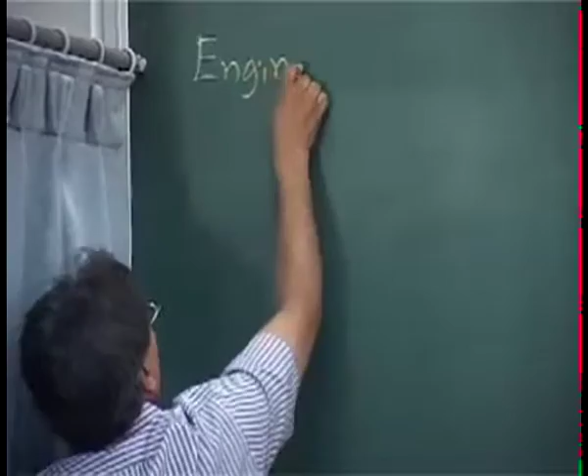So we can say what we are going to discuss is, and first thing we will talk about is the particulate.

Whenever you want to remove something, you need some force. You can't remove something otherwise. If I have to eject you from your chair, I have to use some force. So the force, for the control you need force.

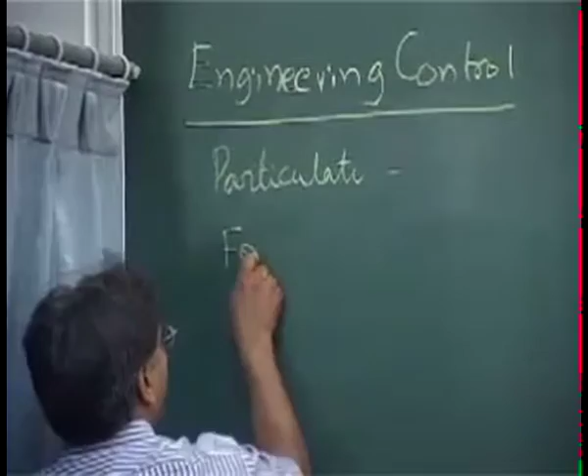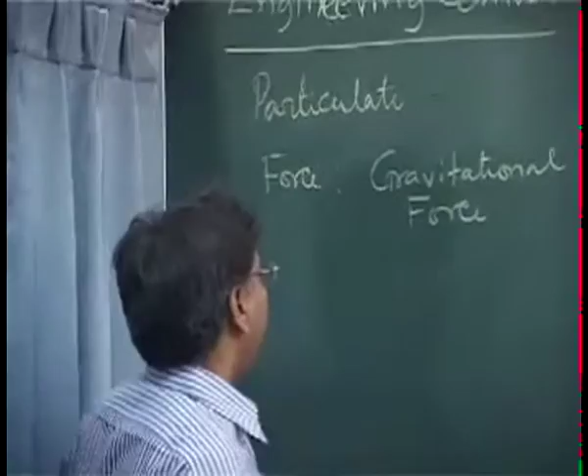What is that force you apply in your water treatment? Gravitational force. So this can be a gravitational force. One can also apply the gravitational force in air pollution control. But this force, which I will show you with some small example, is not so effective, not so powerful, and we will say why it is not so powerful.

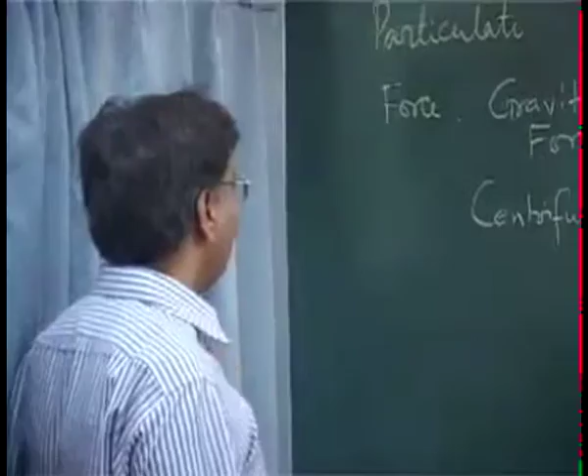So what we do, we apply another force, and then that we call the centrifugal force. And then we somehow, if we understand the centrifugal force, then we can apply it to remove the particle. So I want to do a small example. I want to compare the gravitational force versus centrifugal force for the removal of the particle. Let us see which one is larger and which one makes more sense. We are not talking about where the cost is involved is more. Always gravitational settling will be cheaper because you have to do nothing. Gravity is automatically working. You don't have to introduce any kind of outside thing to improve your force mechanism. So how do we do?

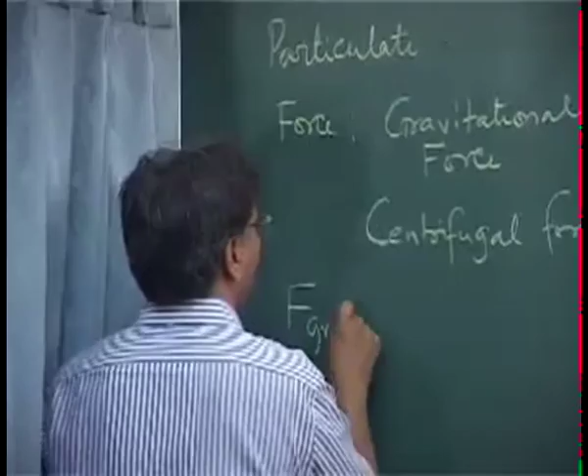Okay, let's compare the forces first. So, gravitational force, F gravity if you like, is mg. And suppose I am providing a centrifugal force, so that force, if I call it C, what is that if you can recall? mv square by r. Everyone recall that?

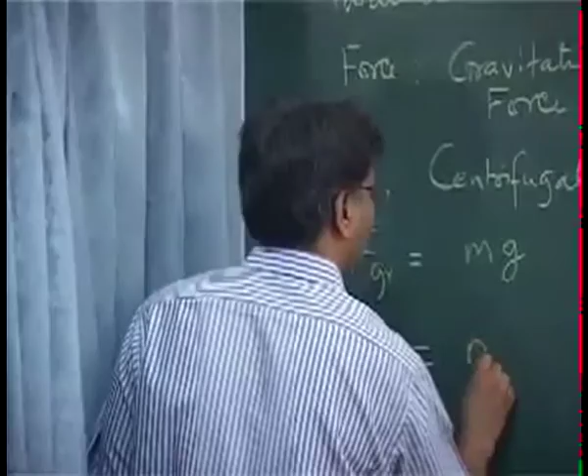Let's call it C, centrifugal velocity. Suppose I take the ratio of these two forces: gravitational force and centrifugal force, Fc by Fg.

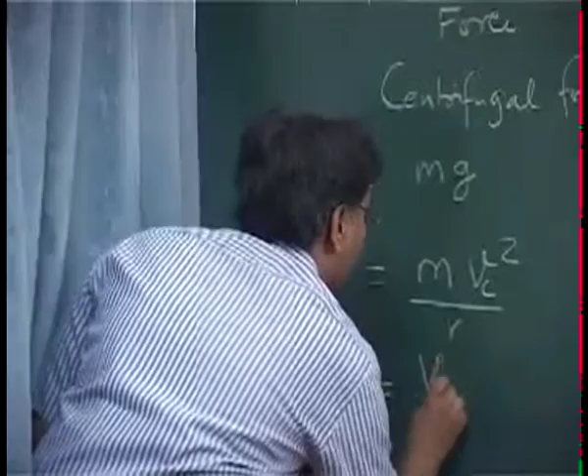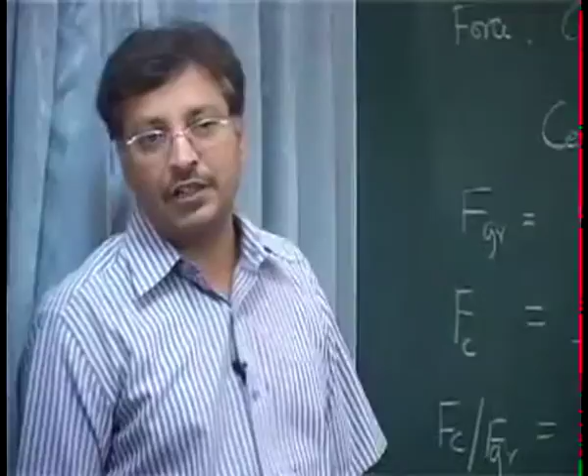This is a simple concept, but it's something you should know well. If I write this, it becomes Vc squared by R by G. Suppose I am able to give the centrifugal velocity as 20 meters per second and maintain a radius of R equals 1 meter, taking G equals 10, how big is this force compared to Fg? My Vc is 20 meters per second, G equals 10, and R equals 1. The answer is 40 times.

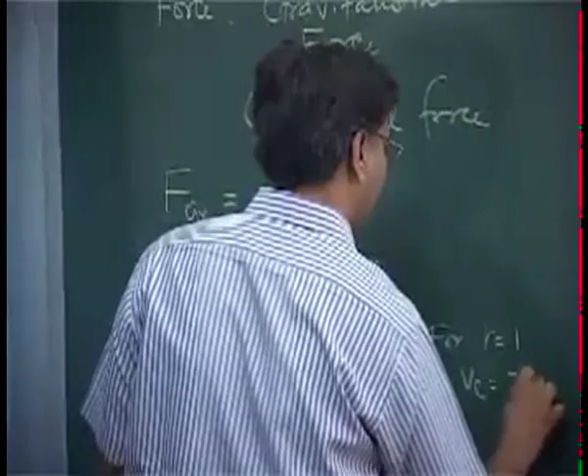This is just an example to explain why we are looking for the centrifugal force. For R equals 1 and Vc equals 20, this ratio shows Fc is almost 40 times Fg. So it makes sense that we should really apply the centrifugal force to remove the particle.

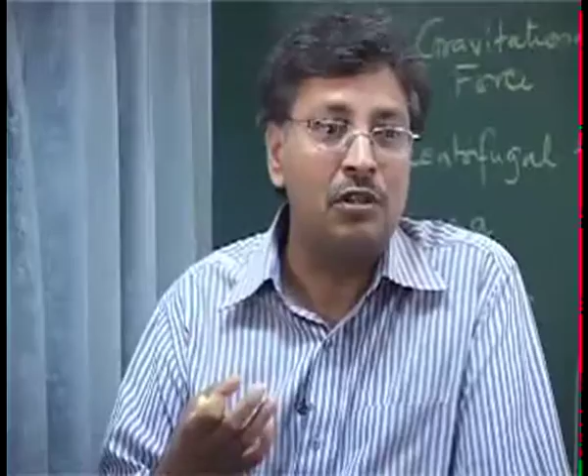Have all of you heard of the centrifuge used in the laboratory? What are we doing? The same thing - we apply a large centrifugal force to separate particles from water, so they quickly settle on the bottom, and then you decant it. If the centrifuge was not there and you had to use gravitational settling instead, you might have to wait overnight for 24 hours for everything to settle, and you don't have that much time. Even if you had such time, our processes are continuous.

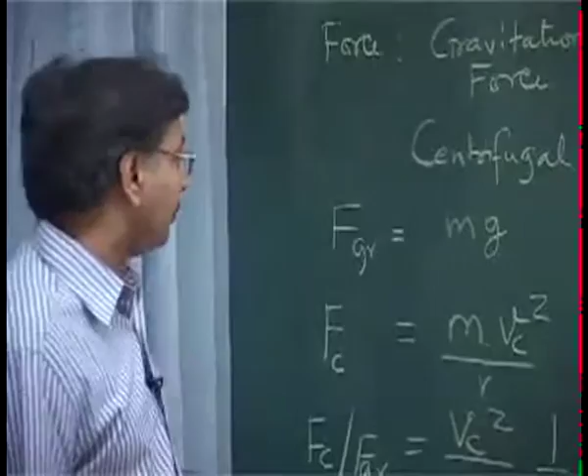If we have to make water or air stable for that many hours, the dimension required for the tank would be very, very huge. So that is also one of the constraints - not only may it take time, but the dimension required may be very high. So we apply - I am not saying we don't use gravitational force - but we apply the centrifugal force in the engineering control of particulate matter in air pollution.

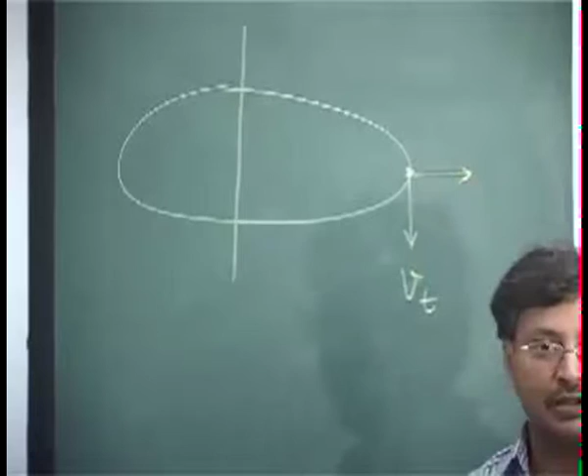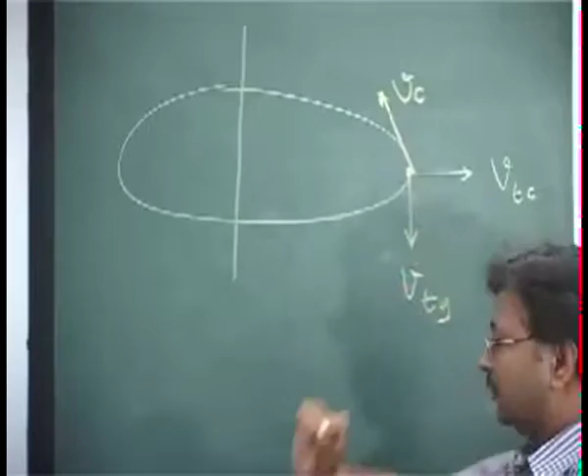Let's look at this from the point of view of the velocity through which particles will be removed. Suppose this is my axis and this is the circular path through which I am providing the centrifugal force. Looking at this point, this is my terminal velocity due to gravity. How does the centrifugal velocity act - which direction? It tries to throw the particle outside. Let's call that VTC, and this one VTG. Where do I show my VC? Tangentially here, right. So this is my VC.

Let us compare VTG versus VTC. VTG is the terminal velocity due to settling - which law governs that? Stokes law. How do we get Stokes law? What are the forces applied on the body? Gravity, buoyancy, and drag - three forces. When the three forces are in equilibrium, the particle attains a constant velocity because acceleration is zero, since the forces are balanced, and you can find this out. If you recall, this will be G by 18 times mu, with particle minus medium, let's call this P for particle.

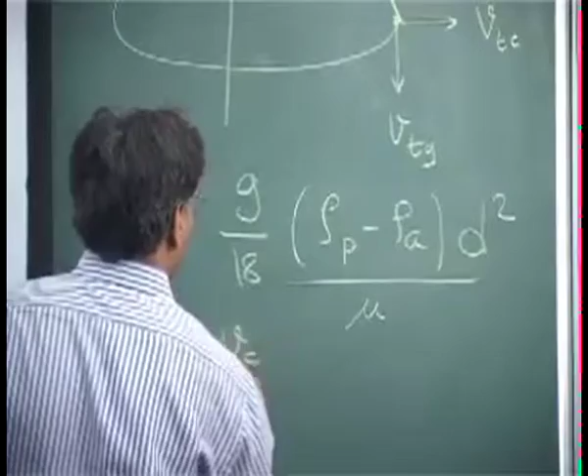Now I have to find out VTC. The same forces are acting, but if I replace the gravitational acceleration g with the centrifugal acceleration, I can get the same equation for the settling or removal velocity with the help of the centrifugal force. What acceleration should I replace g with? Look at this and tell me - what is the acceleration here? V squared by r. So I can replace g and get the velocity for that case - simple thing. So let's write, instead of g, we write Vc squared by r, and add in the same expression.

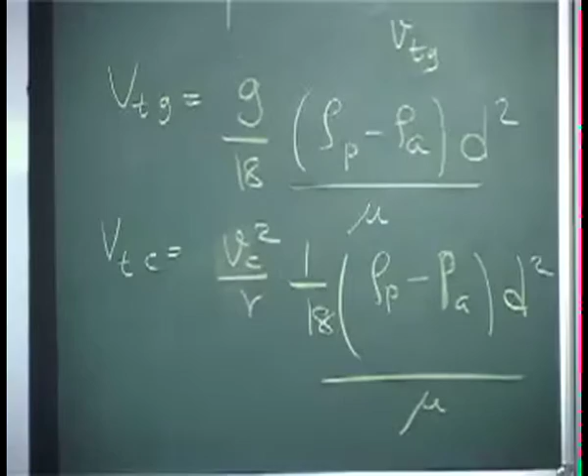Suppose if I take r equals to 1 and Vc as 20 meters per second, how large will Vtc be compared to Vtg? Particle diameter is the same, viscosity of the medium is the same. You see the velocity will be how much time? 40 times if I take r equals to 1, okay, something very similar to what we got. You can find out in terms of meters per second square, meters per second, and you see again the Vtc is also very, very large.

So then why do I not apply the force of centrifugal to remove my particles? The devices through which we use the centrifugal force to remove the particle is what we call a cyclone. So the devices that use this concept, which we derived in a qualitative sense, are called cyclones.

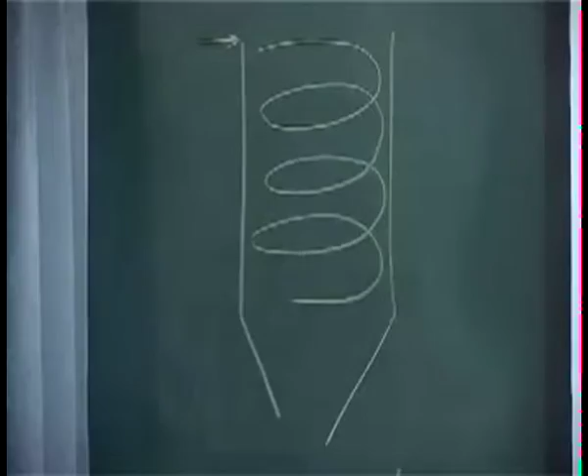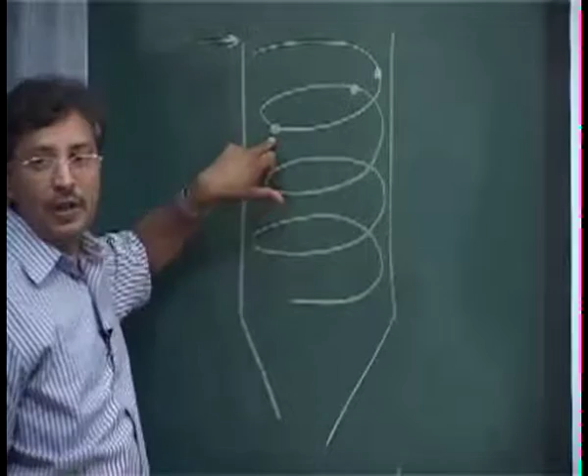Let us say this is the particle, and this is the particle, and let us say this is the particle, because all of them will go along with the gases. That is the helical path being shown here. If I talk about this particle, who has more inertia, the gas or the particle? The particle has more inertia. As a result, the particle will continue to move in its own direction and leave the stream of the gases.

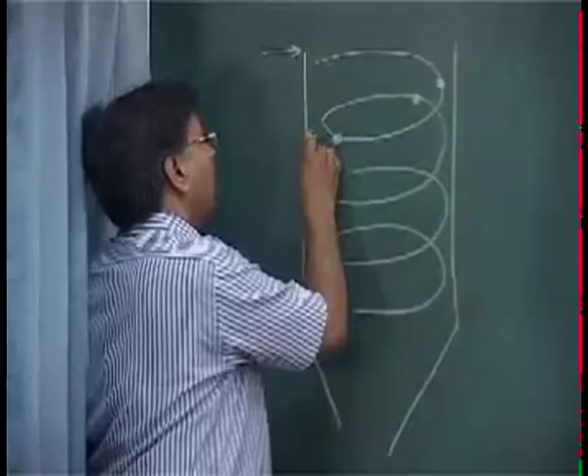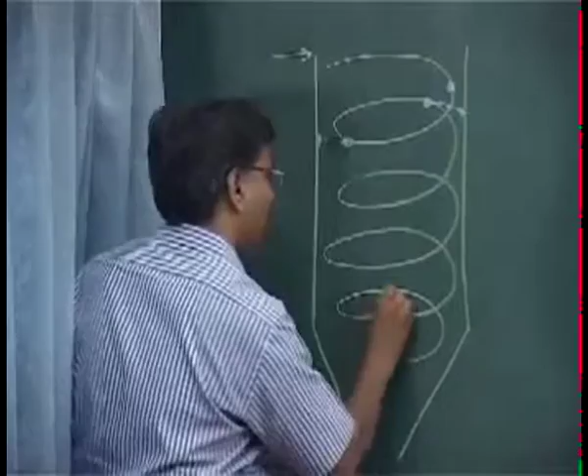So this particle, if we continue with this, it leaves - this is the path of the gases. Because of this tangential velocity, it will come here and hit the wall, and with the impaction it will stick onto this one. And the same thing - this particle, because of its own inertia, will continue to move tangentially, and this is how the whole thing will go on, keep on going round and round. Then finally, when the gas is more or less clean, it moves back with the inner helical to go out.

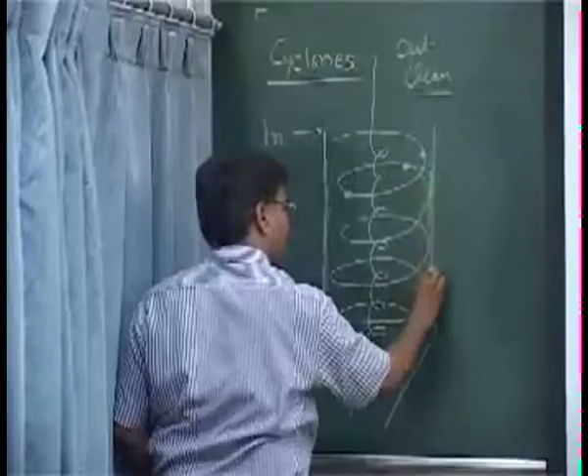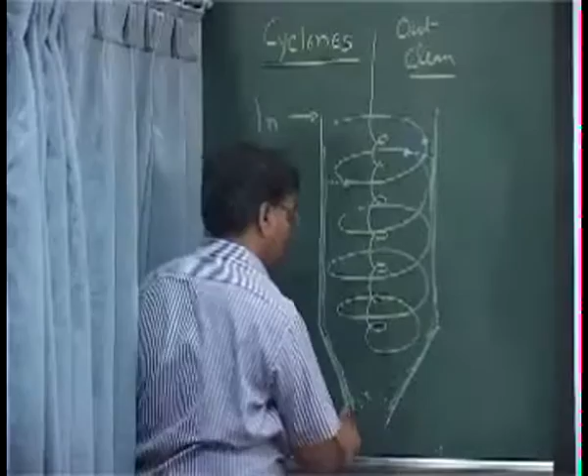And this is clean. You will see within no time the particles depositing here, and then you have a layer of particles here, which falls back into the hopper. These are the particles which hit this one, and then they fall if you shake it a little bit, or just because of the cake as it develops, it will fall here. This is the mechanism through which you remove the particles. One of the ways to remove the particle is to have the cyclone.

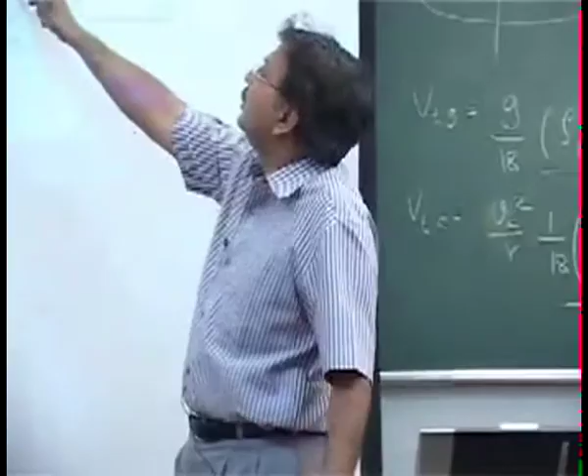So let me again go over a few things I want to tell you. Some of the dimensions you see here, D naught, these are important, what I am saying. This is your diameter of the cyclone.

And this, you haven't mentioned, this is DE, that is the exit diameter. This distance, not from there, because that is connected somewhere, we don't know. But this distance, the outlet pipe must go inside the cyclone body, where do I write it? I didn't write it, but take this as S.

And then this is the height from here to the cyclonic body, that is H1, and the conical section is H2. This diameter is DD, and D naught and D this. So every dimension you see here, H, W, H1, H2, is defined in terms of the diameter of the cyclone. This is a standard practice and it works fine.

So the important thing is D naught, and the rest of the things, that is H, W, H1, H2 and DD, is defined in terms of the diameter of the cyclone, and this definition is like this.

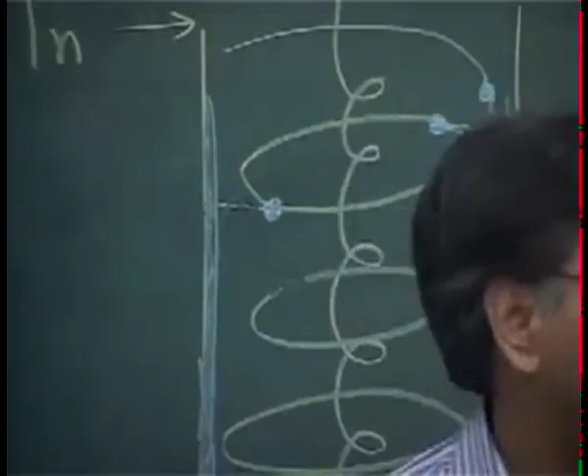W, that is width of inlet, the ratio to D naught is 0.25. H to D naught is 0.5. What was H? The height of the inlet. Suppose I am coming with a pipe which is tangential, this height. So H by D naught is 0.5, and H1, that is the cyclone body, to D naught is 2 times. H2 is the conical section, is again 2.

S is how much the pipe should go into the cyclone to avoid short circuiting. So S is 0.625, and DE, that is the outlet, is 0.5, and the bottom one, which is also important, is DD, which is 0.25. It is kind of a fixed dimension. So you simply need to come to know about D naught, that is what diameter you want, and the rest of the dimensions are fixed. I am sure you must have seen some cyclone somewhere.

So that is how the cyclone works. Let us talk a little bit more about the maths or theory of this one.

This is what we have defined here, the cut diameter of the cyclone. Cut diameter means the particle diameter that will be removed with 50% efficiency. That is how cut diameter is defined. We define cut diameter because otherwise we cannot define the diameter, since you cannot guarantee that something will be removed with 100% efficiency.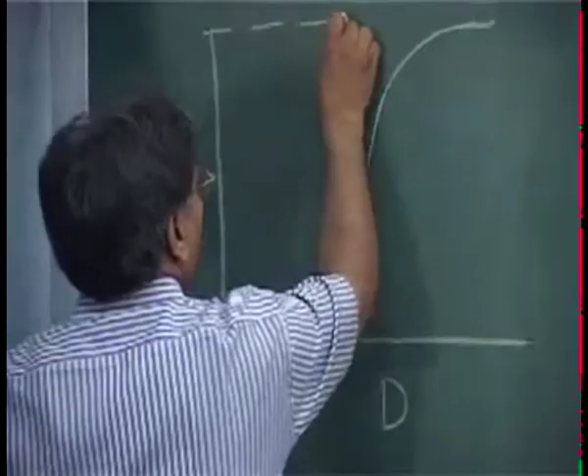So let me draw a graph to explain what exactly D cut is: efficiency of removal on one axis, and D, the diameters, on the other, for particles of various diameters. This is 1, meaning 100% removal. Then here, this is 50%, or 0.5 if you like. This is your D cut, or in the literature you will find this called D0.5. That is what is important for us, to find out with what particle size it will be removed fully.

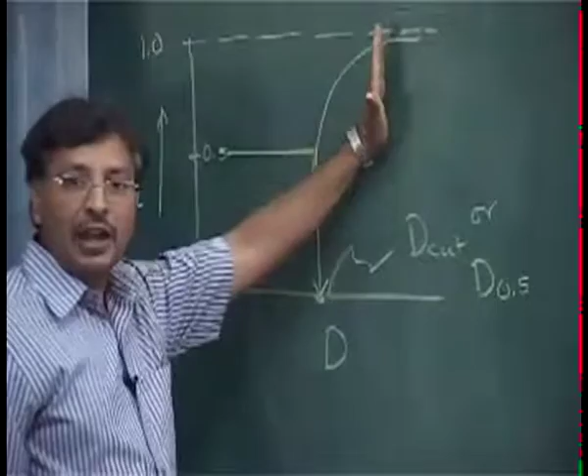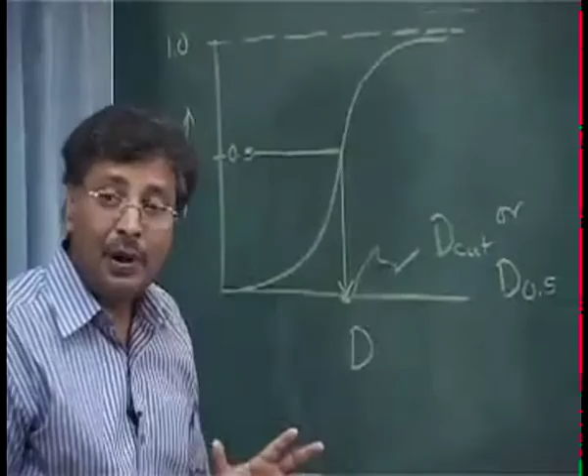Let me explain the terms involved. Particles larger than this will be removed like 99%, 98%, and particles smaller than this will be removed with a smaller efficiency. Have you seen our high volume sampler or respirable dust sampler? You haven't. Okay, doesn't matter, you should see one. So normally for the cyclone we do not define the particle that will be removed 100%. We define the efficiency of the cyclone system as the diameter which will be removed completely with 50% efficiency. So this diameter, as you see, will be removed with 50% efficiency; larger than this with higher efficiency, and lower than this with lower efficiency.

So now let me explain what these terms are. W is the width of your tangential pipe which is going into this one, and Mu is the viscosity of the air.

Vc is the speed that you could give inside. Rho particle is the density, and n is the number of turns that the gas stream could make. So here you see the number of turns of the outer helix. Do not be confused with the inner helix, we know the inner helix turns will be much larger. We have the outer helix in the cyclone, so that is the number of turns it can make.

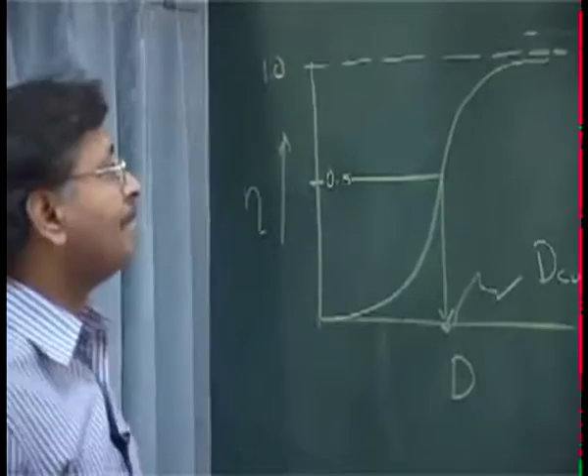You will not have the calculators, but let us discuss the same thing further. If you have decided this is W, you know the number of turns it will take. You know the velocity that you are giving, you can find out the D cut.

Should we do an example? Let us see if we can quickly do it.

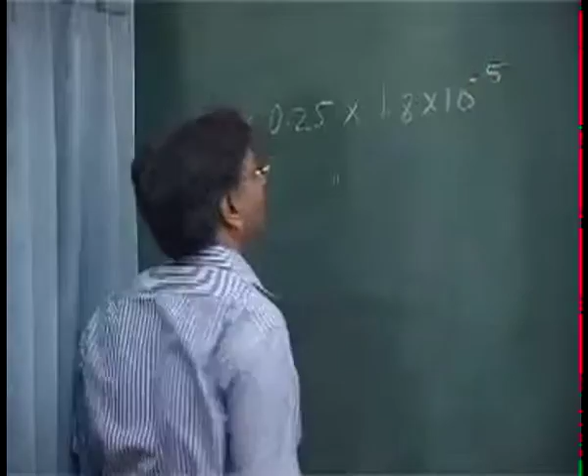Let us say I take that as 0.25, that is my width. Mu is how much for air. Suppose I am able to give 5 turns. Rho particle, let us say 2 grams per cc, so I can write this as 2000 kg per meter cube as rho particle, and I have to have the Vc, let us say Vc is 20. I repeat, W, mu, Vc, 2 pi, number of turns 5, and the particle density as 2000 kg per meter cube. Can we somehow do it quickly, or will it take some time?

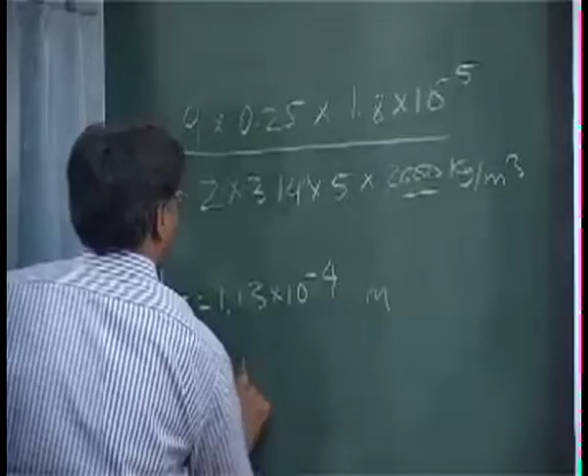1.13 into 10 to the power minus 4, correct? This is in meters. Very good, so this is my D0.5 of this design I am talking about. I can convert this into microns, that is generally what we measure particle size in, microns. So multiply this 1.13 into 10 to the power minus 4 times 10 to the power 6, so that becomes micrometer, and that will be about 113, something like this. This is really a hypothetical number I had taken.

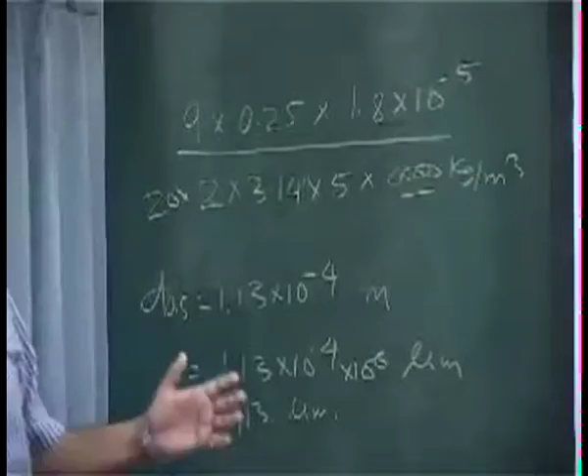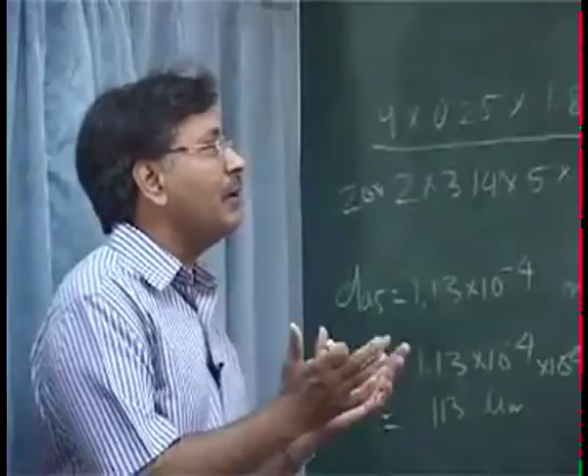But generally, we are able to comfortably remove a particle with size about 5 micron. Obviously since I have taken this as 0.25 meter, this velocity could be increased, but depending on the variables, we can go down to about 5 micrometers as the particle that can be comfortably removed. But then I must define what I mean by comfortable. So let us see what is the comfortability of the system.

What is more difficult, to remove the larger particles or smaller particles? The smaller particles is always a problem. If I want to remove smaller particles, I must bring my D cut down, because I want a small particle. If I want to bring the D cut down, what are the control variables I have? I can't control mu, I can control W, I can control N, but there is a limit for N because it will become too large. I can control Vc, I cannot control the rho particle.

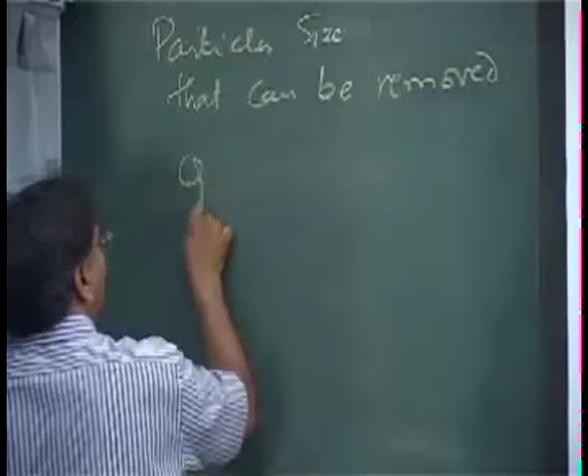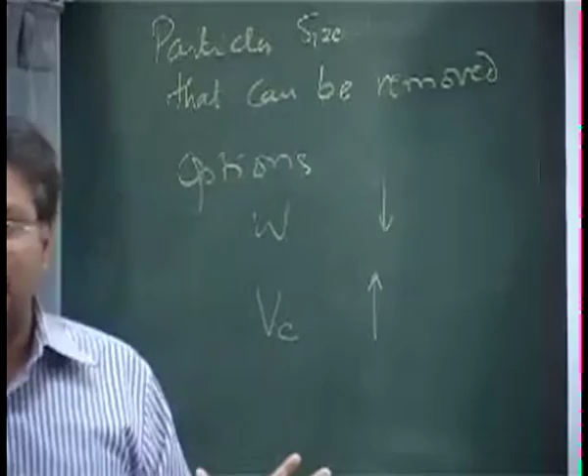I want to define something important which you will need to understand, at least in a qualitative sense, which is the pressure drop across the system. Before we see which is the better option, this one or this one, we need to define the pressure drop, which is delta P across the device. To just give you a feel, if the pressure drop is high, what it means to you: suppose there are two devices, one having high pressure drop, another having low pressure drop.

Vc will be very high if the pressure drop is high.

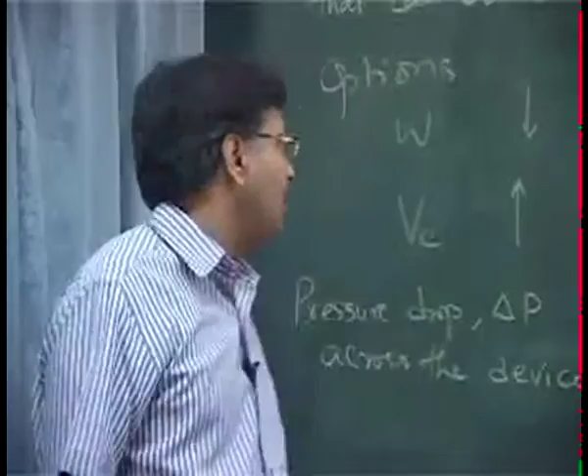That argument we agree, but let's not get into the Vcs for now. I have a system, leave aside the cyclone, say we have a room for ventilation. There's a pressure drop in the room as the fluid travels. If the pressure drop is more and I want to maintain a certain velocity, it means more pressure drop requires a more powerful fan or blower to force the air through the system. If my blower capacity is more, it means my power requirement will be higher.

If the delta P is high, I need a huge blower, and my power requirement will continually go up. We'll talk about this at some other point, but generally delta P is proportional to Vc square.

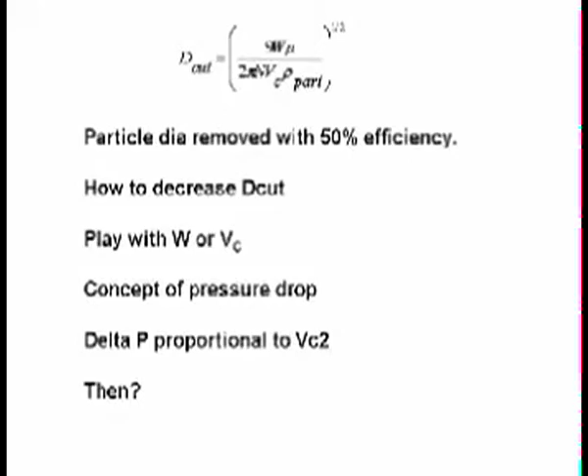So if I decide in my system that I want to decrease my D cut, I can increase the Vc, but I can't increase it too much because otherwise I'll need a very huge blower and my pressure drop will be high. Pressure drop being high means my cost of running the equipment will be high because my power requirement will go up, and that's a major consideration in industry. Size of the blower is also a major consideration.

So generally this choice is not good. I am left with another choice.

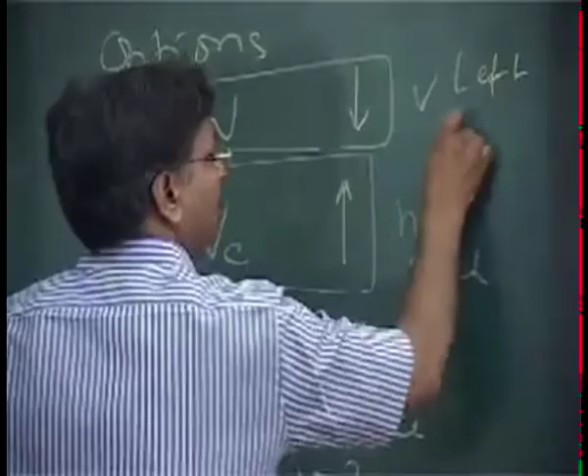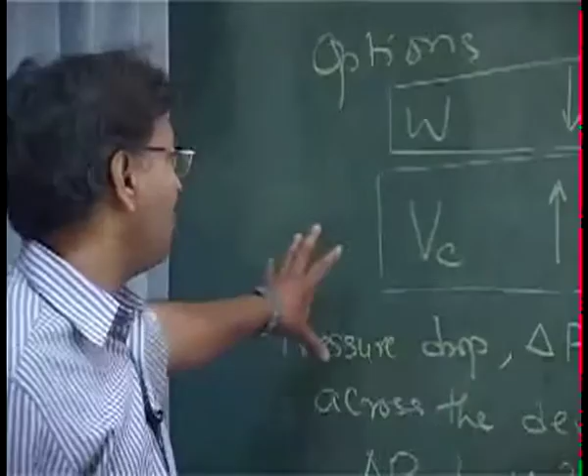I can decrease W. If I decrease W, what happens to my cyclone? I want to maintain the same Vc, because I don't want to disturb Vc—if I reduce Vc, my D cut goes up again. So I keep Vc constant and reduce W, then my cyclones become small. It means I should have lots of cyclones to maintain the same Vc with reduced W.

This system, where we reduce W for the same Vc because we don't want to disturb Vc due to pressure drop concerns, is called multi-clones or multi-cyclones. By going multi-clones, I can reduce the particle size to a reasonable extent, while having more cyclones placed without increasing my power requirement or blower capacity.

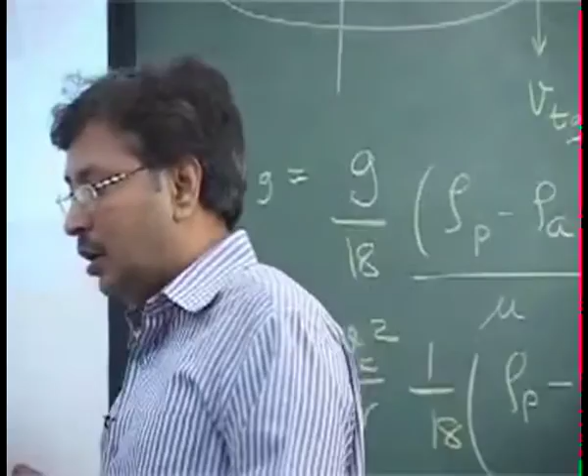But there is a little problem. What is the problem? An important thing that you should understand is that the pressure drop across each of the little cyclones should be the same.

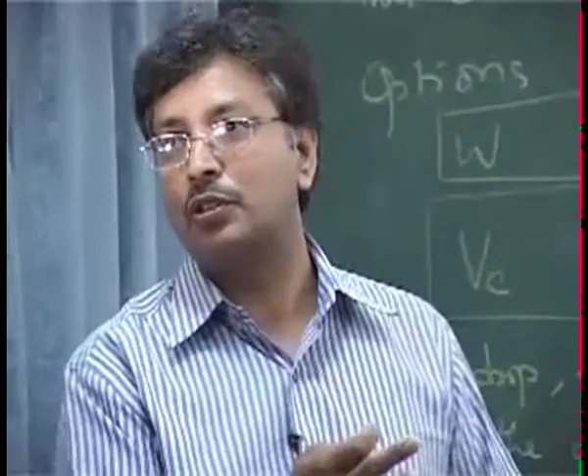If some cyclone has lesser pressure drop, all the air will go through that one, because wherever the pressure drop is less, there is an open area, and the fluid will follow the path of least resistance. So one of the cyclones will be loaded heavily, and the others will not get gas going through them. This becomes tricky, because you have to ensure the pressure drop across each of the tiny cyclones is the same.

That is the key for operating multi-cyclones. You may not find so much detail in the book, but the concept is this: they have some mechanism to measure the pressure drop across each of these, and they have to maintain the same pressure drop.

Maintaining the same pressure drop means maintaining the same VC, and you have to have identical dimensions. You can't have one cyclone bigger and another smaller.

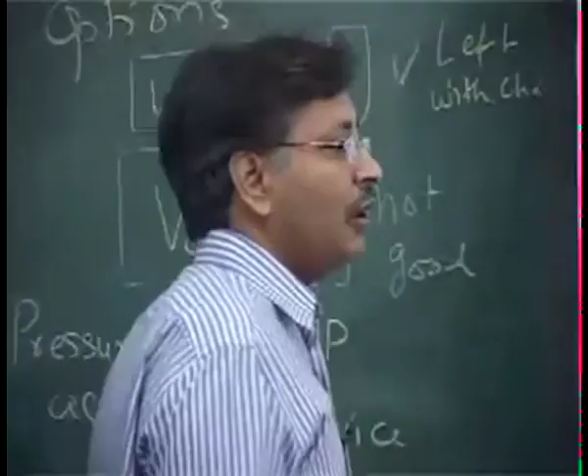You will find this in many plants, whether it's an air pollution application or just cleaning certain things within industrial processes—this is very commonly used. So now you have the concept of multi-cyclones, why we need to go to multi-cyclones, and what we need to maintain to ensure they function properly.

Now I want to move to something else. There is a limit to what centrifugal force can do, so we should think of applying more force. Centrifugal force works up to some level, but in combustion processes and many other processes we encounter particles even in submicron size—1 micron, 0.5 micron, 0.2 micron—and these are more dangerous than larger particles.

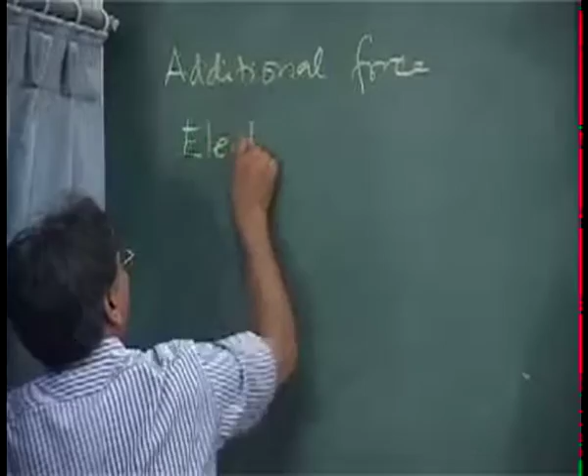If your particle size is larger, you can go ahead with the cyclone and be happy, but that's not always the case. So sometimes one additional force that we apply is electrostatic force, an additional force, to remove smaller particles.

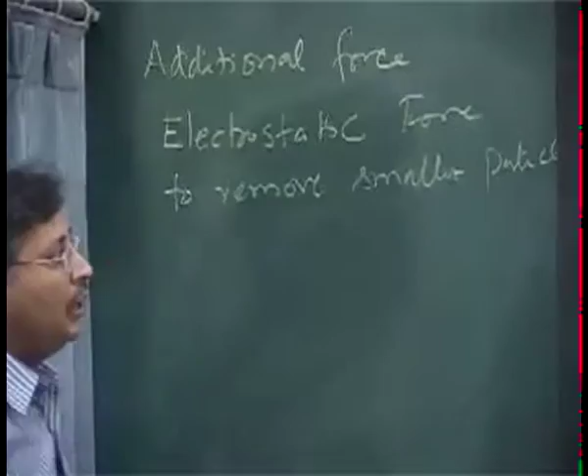Let's work out the physics of this. Why would electrostatic force be a better approach? Suppose, in general—again we are not talking about the ESP specifically—

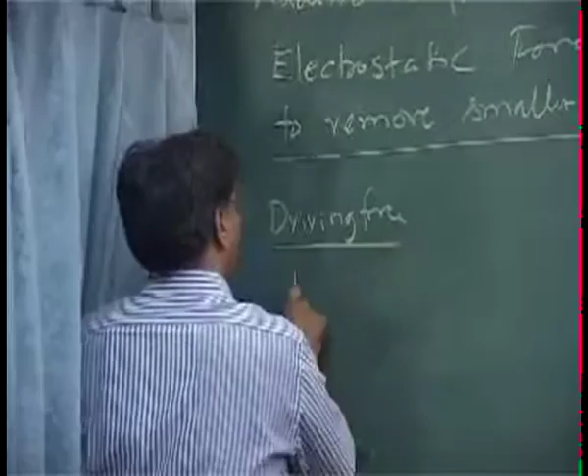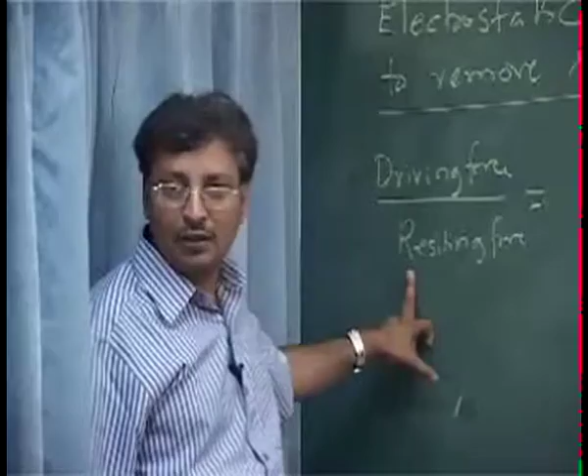I am driving the particle to come and get removed, applying various kinds of force. One force was gravitational force or centrifugal force, and there is a particle resisting—it doesn't want to move, or something is stopping it from being removed. That resistance is normally a drag force.

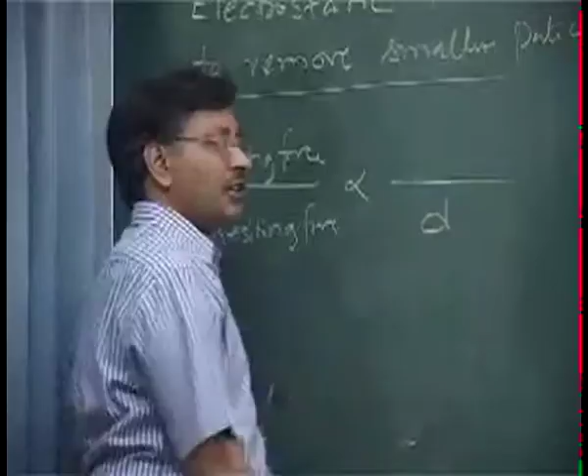So let's try this: the drag force in terms of the diameter, since we are focusing on diameter, is proportional to the diameter of the particle. If I say the driving force, which may be gravitational or centrifugal force, in terms of diameter—what is that? Is it the square of the diameter, the square root, or the cube?

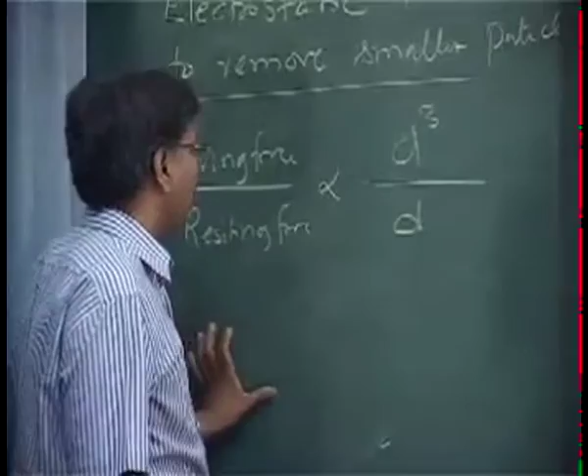Mass is the same—it's the cube, right? You agree? So this is d cube, because whatever force you take, there is a mass involved, and mass is related to volume, so more mass means it's related to d cube. So it means the driving force is proportional to d cube, and the ratio becomes proportional to d square.

In the case of electrostatic force, this is more like a surface phenomenon. So this ratio of driving force to resisting force, since this is a surface phenomenon—electric charging, electrostatic force—is d square by d.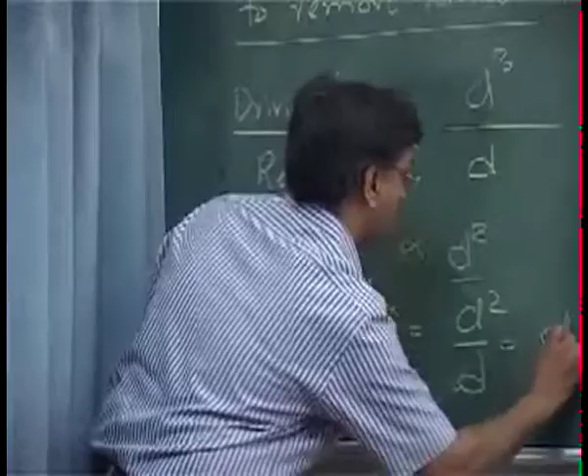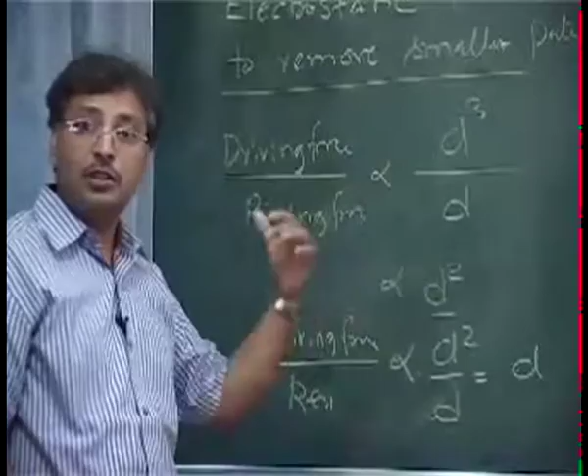So if I want to enhance this force, when I am going to the smaller particles, my diameter will reduce by the square, because I am going from higher particle to lower particle. So if my diameter is reduced, it means my driving force is reduced effectively, because this will reduce with the square of the diameter. My d has become, let's say, now 0.5. So this force ratio will be 0.5 into 0.5, which is 0.25. So it means my driving force is like 0.25.

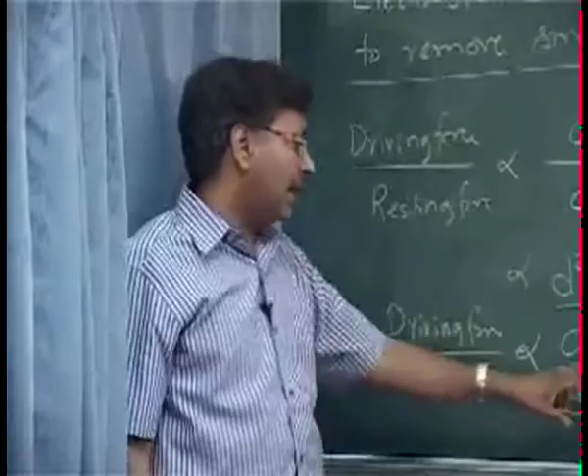And suppose I am using the electrostatic force, and if I have gone d from 1 to 0.5, how much is the driving force now? Proportional to 0.5. My d has become 0.5d. So my driving force is 0.5d, whereas here the force was reduced to 0.25d. So it means if I go with the concept of electrostatic precipitators, I can, with the same force, reduce much smaller particles.

The mathematics part, writing the equation and design, you can even do with the handbook, but this is what you have to understand: if I use the electrostatic force, I can even go on to smaller particles, and I will still have my driving force which is more compared to gravitational settling or centrifugal settling, because my driving force will reduce here with the square of the diameter.

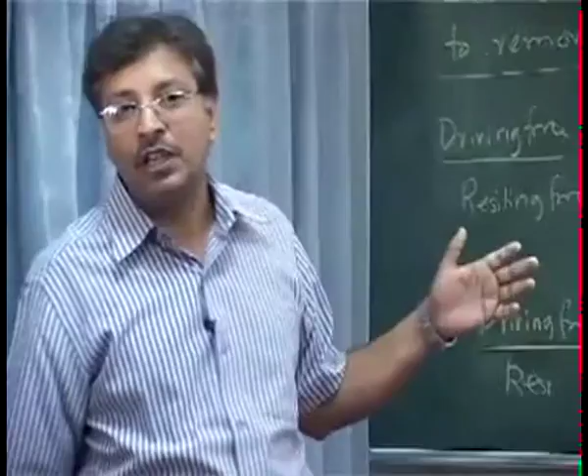From d, whatever my force was there, if I want to go for half the size of the particle, this force becomes 0.25. Whereas here it will become only 0.5, and when I go smaller and smaller, this becomes more and more meaningful that we go for the electrostatic force and use it. Okay, you understand?

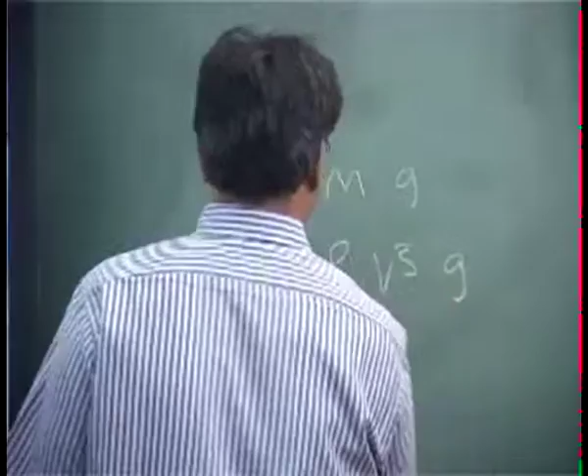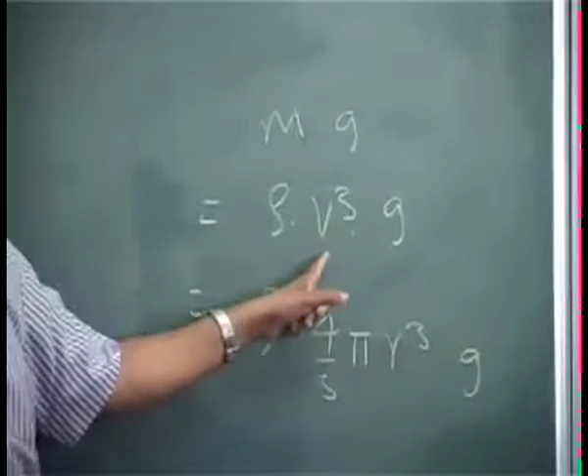For those of you who have not understood why this force is proportional to d cube, let me explain why the driving force was d cube. mg, for example, m I can write as rho v, rho times v I can write, suppose it is a sphere, 4 by 3 pi r cube, which is nothing but d cube. So that is where the d cube has come from.

So now is this point clear, why did I write d cube here? Okay, so this point is clear.

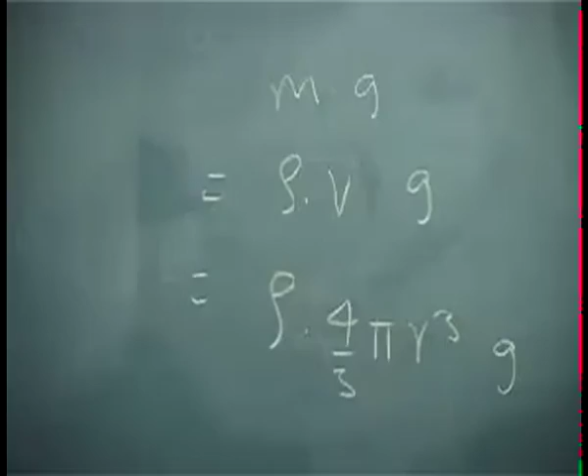So we can use electrostatic force, and the system that uses electrostatic force to remove particles, especially when we are interested in removing very small particles, we apply the electrostatic force, and the device that uses this is called an electrostatic precipitator. That device will use more of this electrostatic force, which is a surface phenomenon. We will be discussing this in the next class.

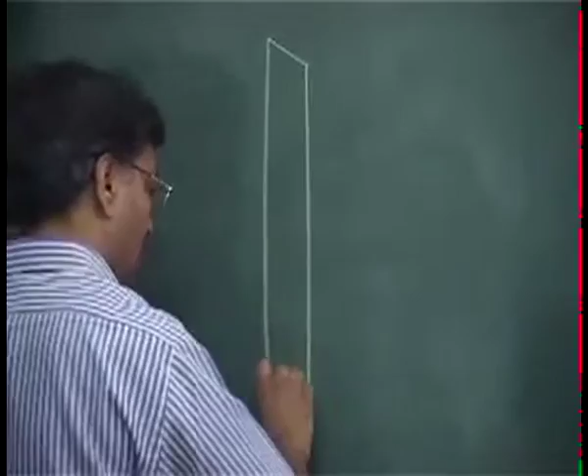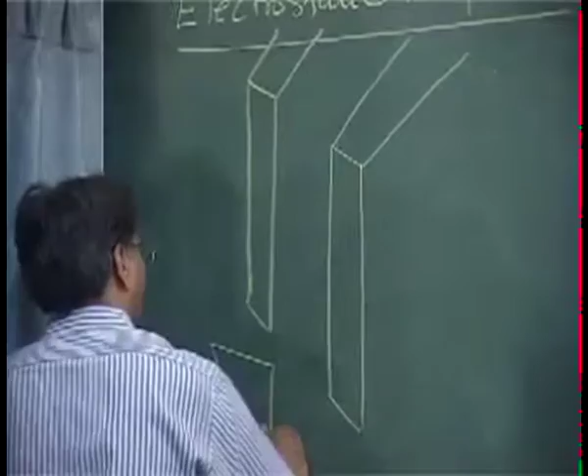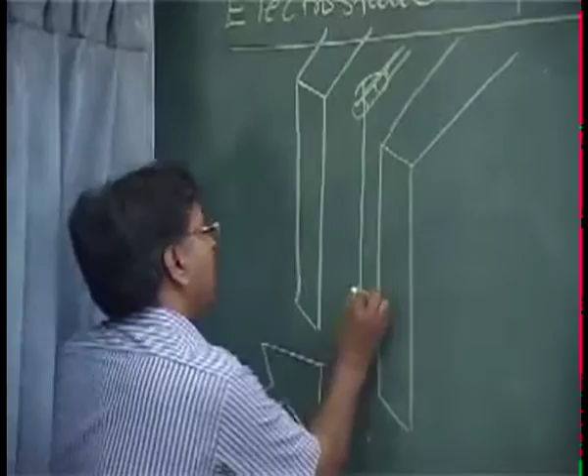I am drawing the same plates but in 3 dimensions, and your air is entering from here - dirty air entering between the two plates. Within the plates, you have a charging electrode. If I have a rod here with a wire, and that wire hangs like this with a heavy weight, there is something like a pendulum hanging between the two plates, which you cannot see here, with a heavy weight so that it can stand.

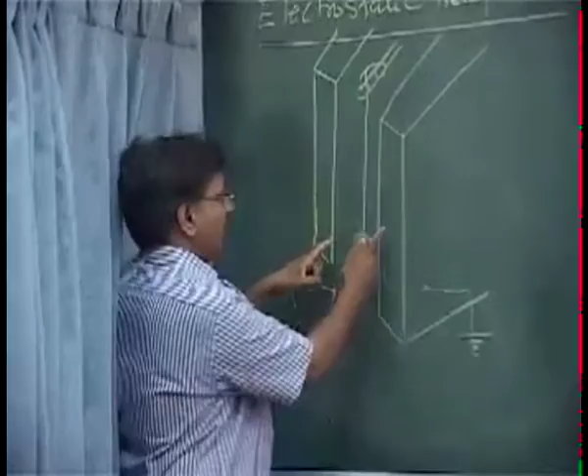And these plates are grounded, and then you apply a DC voltage across the plate and the charging electrode. So this is what we call the collecting plate, and this is the charging electrode. The voltage applied is of the order of 40,000 volts, and it's a DC voltage.

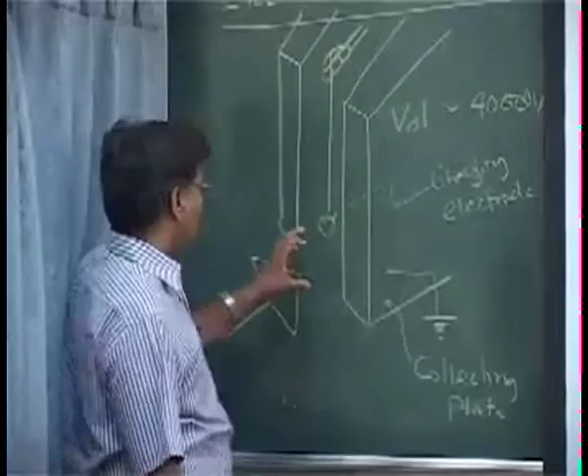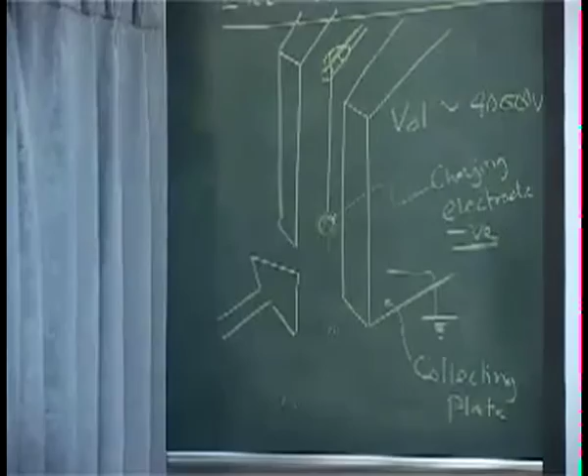Now what happens? Once it comes through this, generally this charging electrode is negatively charged. And you will see, if we look from the inside, let's take a blow up of that thing and see. Okay, so here I think we'll stop it here.